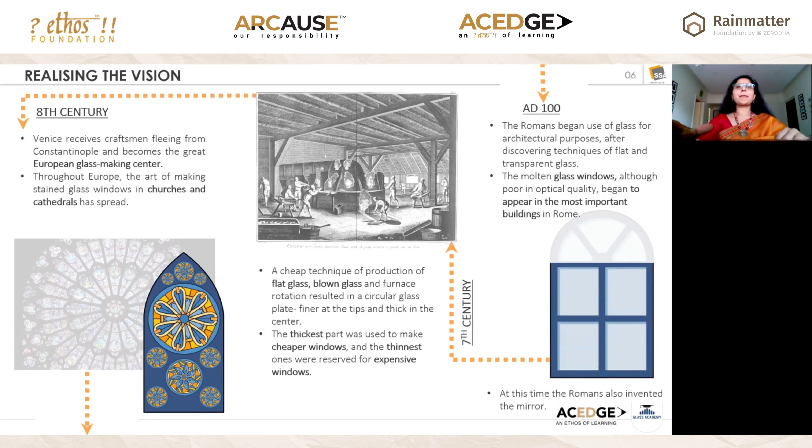In the 16th century, the manufacture of glass extended to France, England, and Germany, and various techniques were perfected. Larger flat panels with smoother and more homogeneous surfaces were formed. You can see that evidence in palaces, and the Palace of Versailles is the greatest exponent in which glass was used, and glass was used in the manufacture of fine tableware during the 17th century. With the founding of the British Plate Glass Company, England became the world's center of window glass, and for the first time in history, window glass was accessible to a large part of the population.

In the 19th century, the Industrial Revolution in glass, where iron and glass were blended together and became a great novelty of modern architecture. And that's where in 1851, the Crystal Palace was built entirely with these two materials. That's where I think the engineers and architects brought a real revolution, where when you go and visit, you can see that it's a true romance of glass and steel or iron, done in the 19th century.

Once we come to the 20th century, in the 1950s, float glass was created by the British Alastair Pilkington, and you could see Walter Gropius and Mies van der Rohe using it more in straight lines, creating a different kind of impact with this material and gaining a lot of transparency in architecture. In the 21st century, the glass industry has become a global industry as the patent of the Pilkington process expired and the costs of a glass factory were drastically reduced, and today we can find them around the world. So this was the revolutionary age where glass became a very popular material.

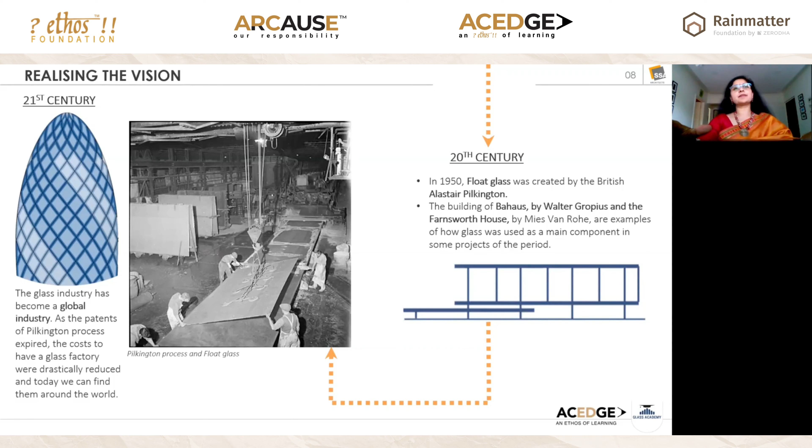Let's see what happened in India. In India, the development of glass technology in South Asia may have begun in 1730 BC.

Evidence of this culture includes the red brown glass bead, along with other beads dating to this period, making it the earliest attested glass from the Indus Valley. So we could see these evidences around 600 to 300 BC.

Since prehistoric times, people of Mohenjo-daro and Harappa, through trade and contacts with ancient Sumerian glass, developed glass traditions. Firozabad is a glass city of India and started glass production back in the 17th century. Research says the first glass plant was set up in August 1908 by Lokmanya Bal Gangadhar Tilak somewhere in Talegaon. This was an interesting fact I found in the research.

In the Indian context, you can extensively see the use of stained glass in the Mysore Palace, with more Indianized motifs of flower ornamentation.

The Mysore Palace also has a complete hall of mirrors, showing a lot happening with glass in the Indian context.

The City Palace of Udaipur, completed in the 16th century, and the Sheesh Mahal are examples where the architecture itself becomes a mirror of life. That's where the history ends.

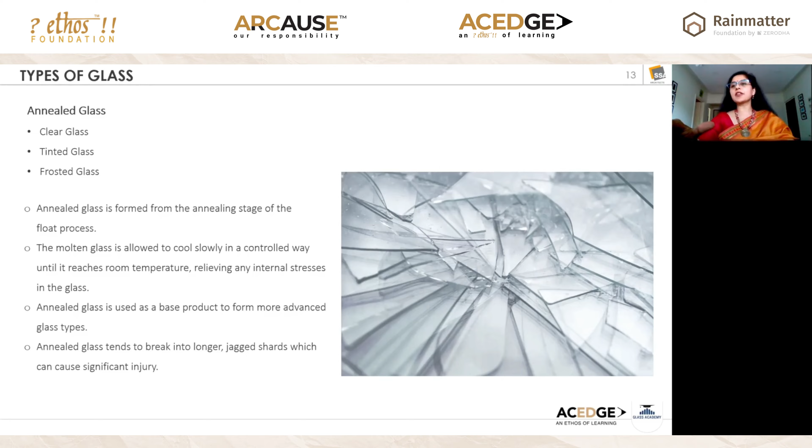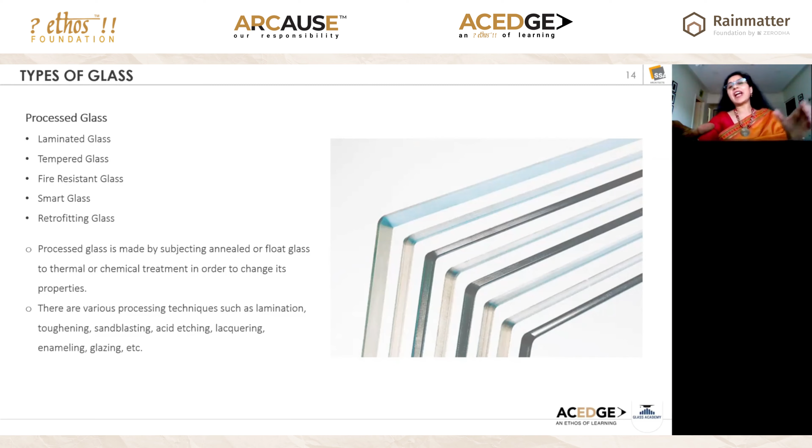Processed glass includes laminated glass, tempered glass, fire-resistant glass, smart glass, and retrofitting glass. Processed glass is made by subjecting annealed or float glass to thermal or chemical treatment to change its properties. Various techniques modify the brittle nature of glass, making it a strong structural material. Because of height or wind pressure, it's important that the material can perform structurally in adverse conditions, so these processed glasses are used in the actual construction industry.

Laminated glass is manufactured by sandwiching a layer of plastic such as PVB between two sheets of glass. This interlayer makes the glass impact resistant and sound resistant. Upon breakage, laminated glass remains intact as the broken pieces stick to the interlayer.

Tempered glass, or toughened glass, is formed by heating annealed glass to develop opposing stresses on its surface, making it much stronger than regular glass. In the construction industry, you'll see tempered or laminated glass used from a safety perspective.

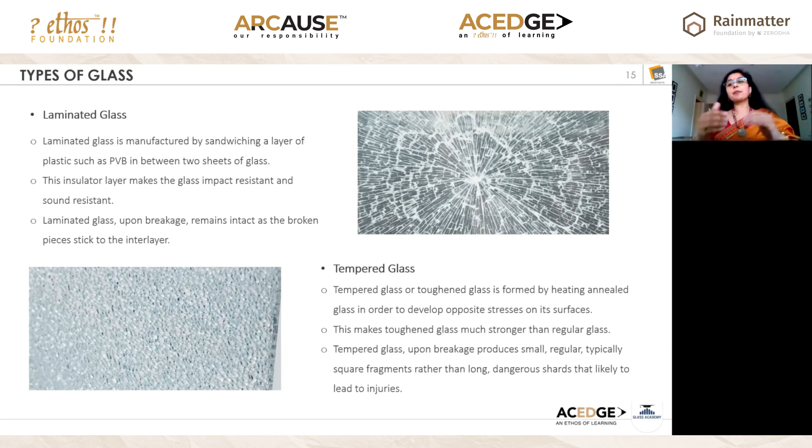The picture shows that when these glasses break, they don't cause injuries wherever they are used, whether in residential or commercial contexts. The uses are defined based on the application or type of building, and the glass is picked and chosen accordingly.

A very important aspect is fire-resistant glass. These glasses are not much used in facades, but in strategic areas as an exterior material, or more commonly in data centers, internal partitions, or as vision panels. This is a multi-laminated glass with an intumescent layer that can withstand extreme heat, smoke, and flames.

Based on the National Building Code and fire rating, thicknesses range from 7mm to 20mm to 30mm, and the cost increases accordingly. When using fire glass, the entire assembly must have the rating—not just the glass, but every element of the framework has to perform with fire resistance. It's important that the entire assembly is tested when used as fire-resistant glass.

Smart glass is a type of glass that switches its optical transmission properties due to the passage of current, allowing the glass to change from transparent to translucent and vice versa.

So you can see the interior application, where as per usability you can utilize this glass in a peculiar fashion. There are certain spans where you would need structural members to support or fit them, or certain hardware available by which you can use this glass.

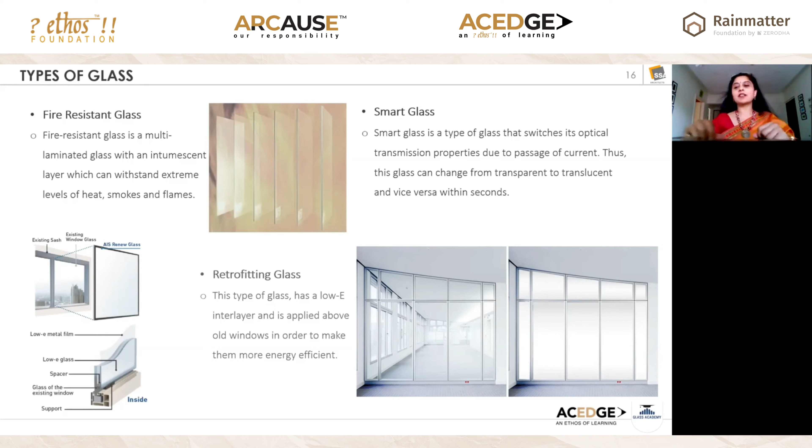There are new trends, as I said, in the past you could see stained glass which was more ornamental. Now glasses are coming as ceramic frit or dichroic glasses, which can have that kind of ornamentation with new age technology, where you can blend them into your architecture and use them wisely as per your design. So what is dichroic glass?

This glass was originally created by adding a trace amount of gold and silver to a large volume. The resulting medium partially reflects the light passing through it, causing an observer to see different colors depending on the direction of the light source.

This can be produced using titanium, zirconium, and vaporization kind of technology. The vapor then condenses on the surface of the glass and forms a crystal structure, and a protective layer of quartz crystal is sometimes added. Other variants of such vapor deposition or PVD coating are also possible.

So this gives you some sort of different effect on your surfaces. Probably you can use them in interiors, probably in exteriors, looking at overall application, and create very interesting features for your buildings.

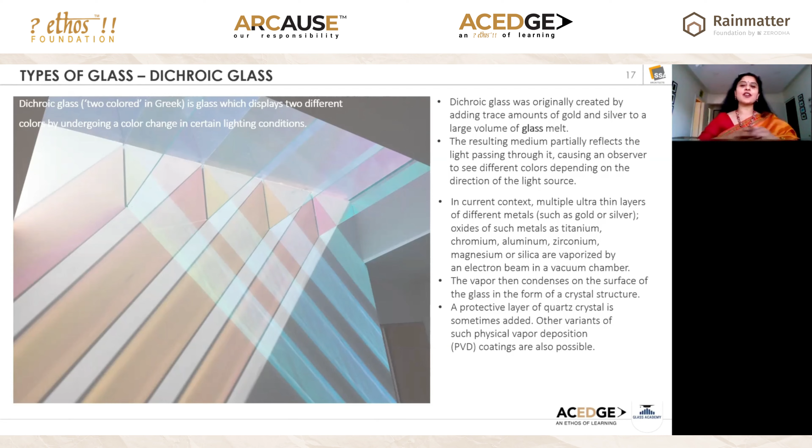I'm just showing an image which makes it look very interesting - usage of dichroic glass in an office building. There's a very playful quality you can get into your interior spaces, and with large spans, this kind of material can be thought about.

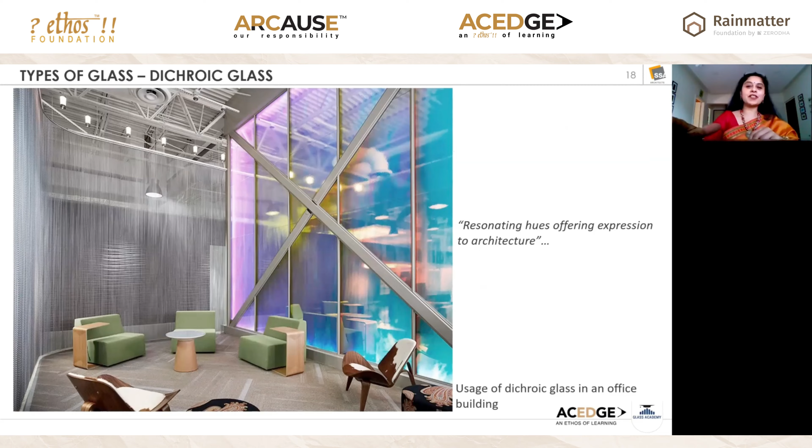Back painted colored glasses can be used. Any kind of patterns can be created over the glass, making it look more seamless and interesting with new age technology. So ceramic fritting is one more option by which you can have a silk screen kind of printing done on the glass.

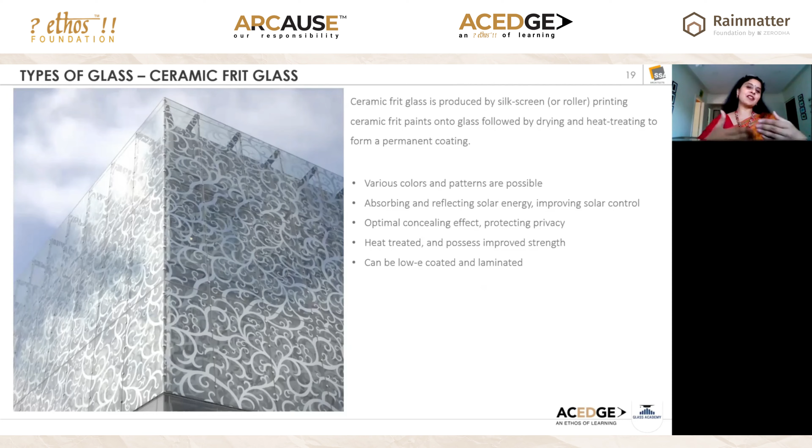So what are the pros and cons of the material? Let's first understand the pros. It's a lighter building material, that's why it's used for high rises. It blends with the exteriors and interiors. There's ease in installation, it's a flexible building material, a very strong material with its own strength, and it aids in urban modernization.

It's a faster product, available and very much possible to implement and construct, and recyclable. Of course that's a very important aspect today - whatever material we recommend has to have that kind of recycled content to make it more and more green.

So what are the cons? Glare - if you don't choose the right kind of glass or right percentage of glass, then we have to face the glare. Heat island effect, as I said, reflecting too much sun and disturbing surrounding development. Then privacy - if the glass is more reflective, you get the reverse reaction at night, so it could impact your privacy.

Safety parameters - if the recommendation isn't done properly, where a laminate needs to be used, if you go with tempered or toughened glass instead, then safety could be an issue; the impact needs to be understood. Maintenance - if these materials and facades are not maintained properly, it's going to create non-maintained urban scenarios. And construction tolerances are another issue we see during implementation, which could create cracking, uneven surfaces, or leakages.

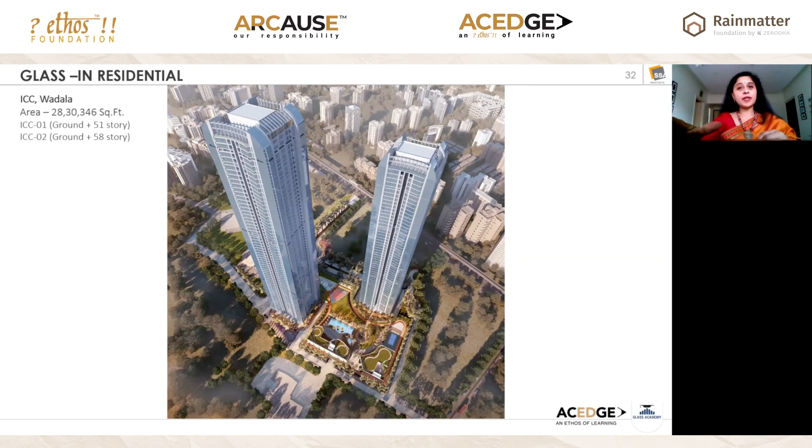Now this was the building where the complete unitized system was implemented. As there were no decks, the complete window system was the unitized system, and for this kind of high rise, that's the best solution. So this is how these two towers are completed right now.

So these are all single glazed units, but while selecting the glass - whether coating is in or out, the U values, the VLT - were all analyzed by energy simulation, and the right kind of glass were chosen.

So this is how the unitized system works. I'm going to show you the detail of how the unitized system functions in the residential context. It's a wonderful solution, it blends wonderfully while constructing - especially when within your bylaws there are no balconies or decks.

For high-rise buildings with flat slab construction or PT slab technology, this kind of unitized system is faster. With unitized systems, a lot of work is done off-site, and that's why it rapidly gives you results, allowing you to go fast in your construction.